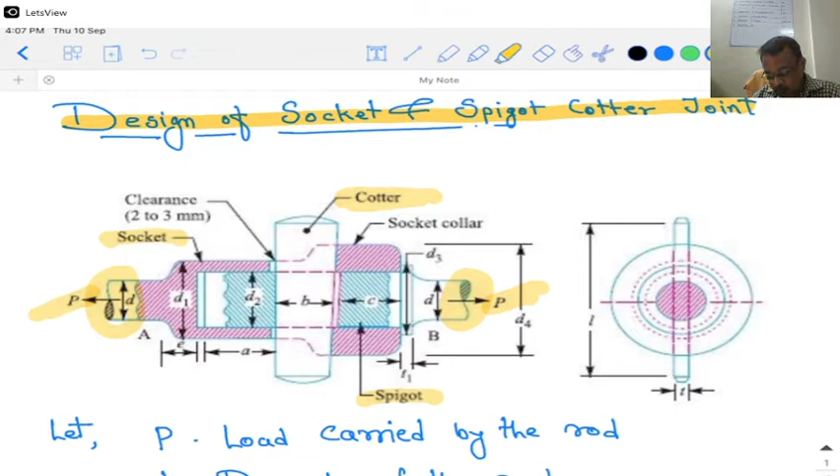Now whatever this socket and spigot cotter joint is there, we are going to design it for the tensile load. Why tensile load and why not compressive load? Because most of the time this joint is fabricated from material which is stronger in compression than in tension, and that's why most of the time this particular joint is designed for carrying the safe tensile loads. Okay, so let us now start.

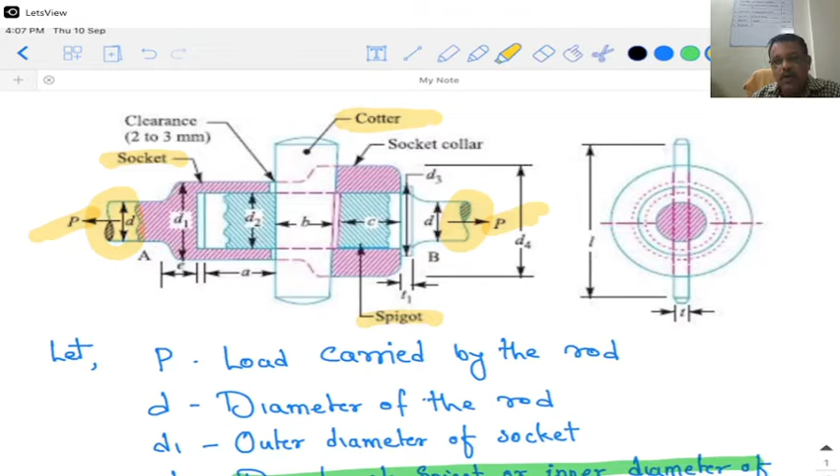Whenever we say that we are going to design this particular component, what we have to generally do is decide what are the various dimensions of that component so that it should not fail during working. Now let us start with this.

Let P be the load carried by the rod. P is the axial load, or we are assuming this is the tensile load which is acted on both the shafts. D is the diameter of the rod. Both the rods which are connected to each other through the socket and spigot joint are assumed to have a diameter D.

D1 is the outer diameter of the socket. What is this D1? If you look at this particular socket, this is the outer diameter.

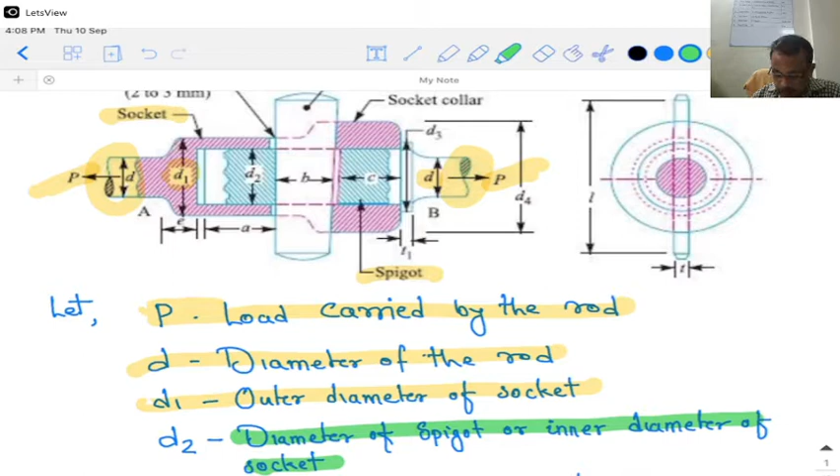D2 is the diameter of the spigot, or inner diameter of the socket. You can see over here, D2 is the diameter of the spigot, or it is the inner diameter of the socket.

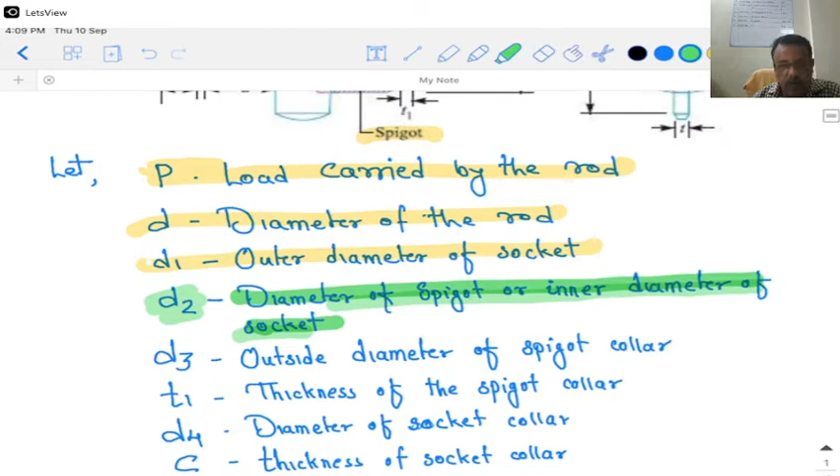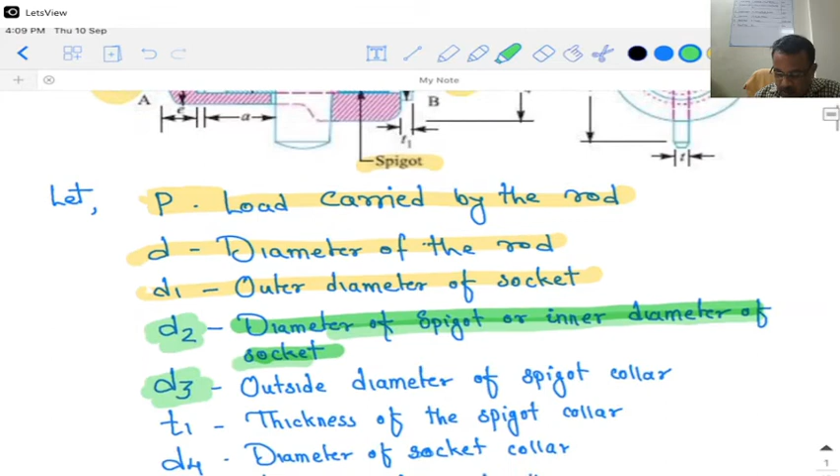Then D3 is the outer diameter of the spigot collar. This spigot is having a collar so that its maximum insertion can be restricted into the socket. So obviously this collar will have a larger diameter than the spigot itself, and D3 is nothing but the outside diameter of the spigot collar.

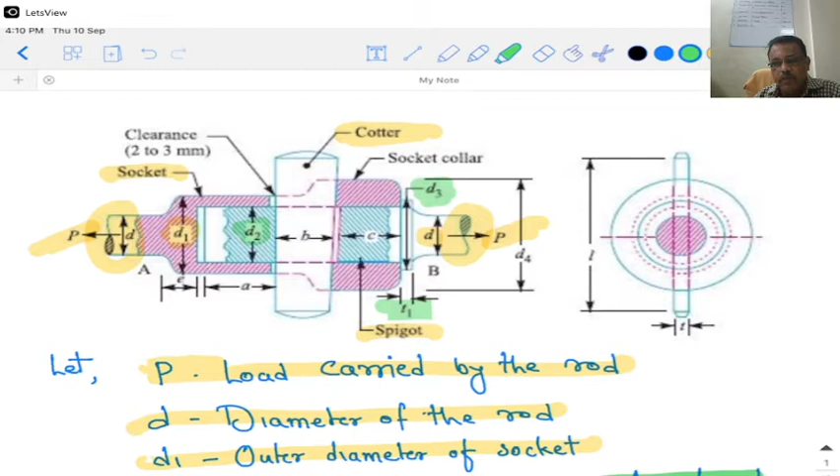T1 is the thickness of the spigot collar. Whatever this spigot collar is there, it is having a thickness T1.

Now D4 is the diameter of the socket collar. So the socket is also having a collar, and D4 is the diameter of that socket collar.

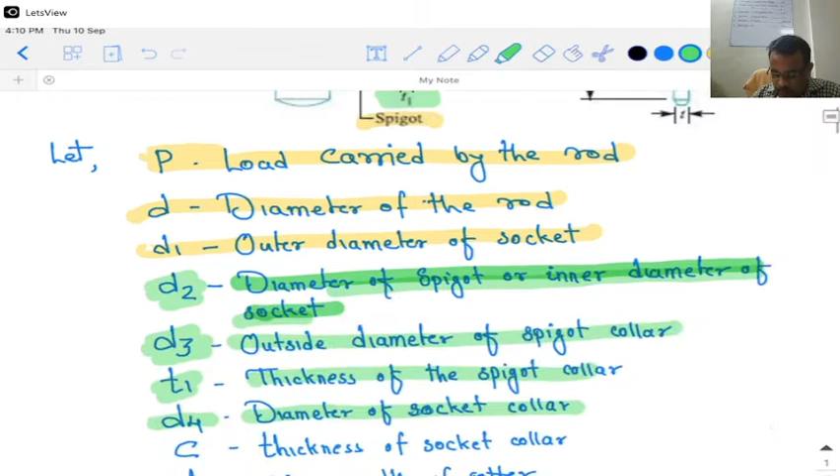While C is the thickness of the socket collar. So whatever thickness the socket collar is having, we are indicating that by the letter C. This is the thickness of the socket collar.

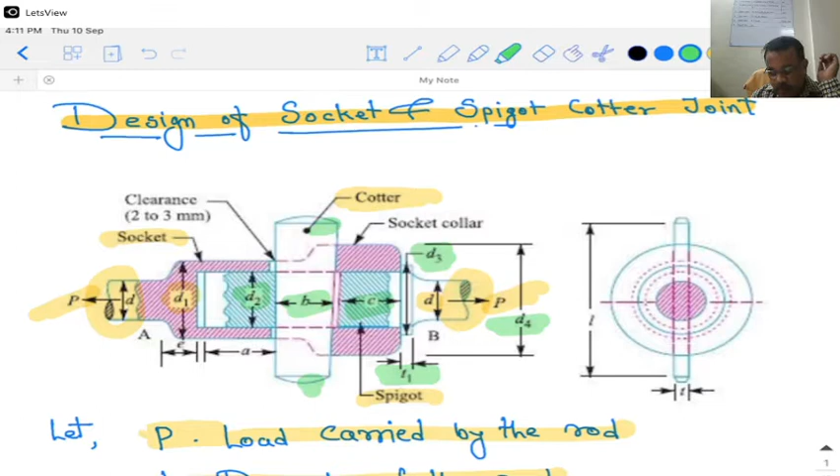Now what is B? B we are considering as the mean width of the cotter. As we know, this cotter is going to have one side tapered, so obviously the dimensions or the width of the cotter is going to change from top to bottom, but B we are considering as a mean width of this cotter.

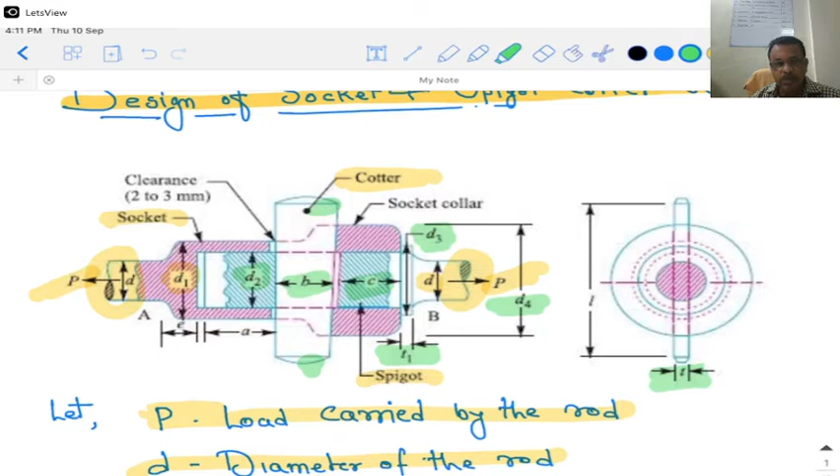While T is the thickness of the cotter. As we see over here, if we look at the side view, T is the thickness of the cotter. So the cotter is actually having two dimensions, as it is a rectangular section, B and T, and obviously length L, the length of the cotter.

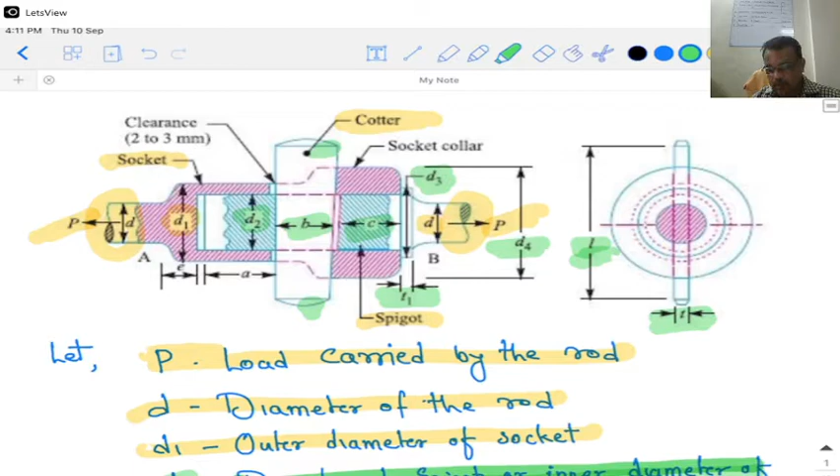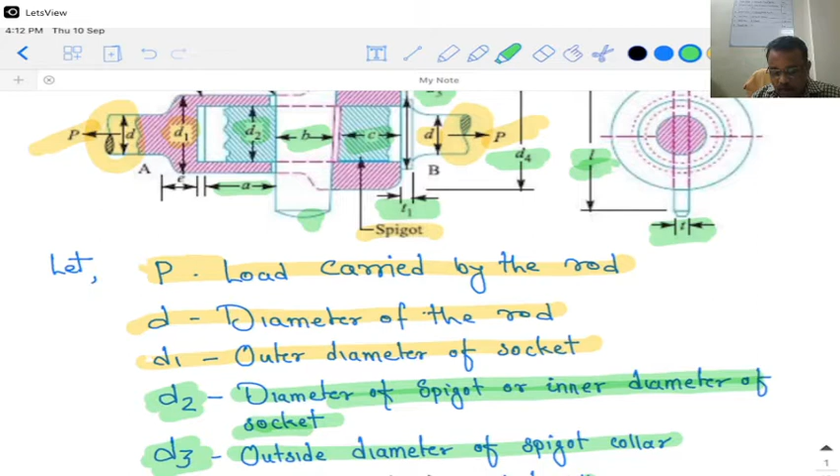A is the distance from the end of the slot to the end of the rod for the spigot. If you look at this diagram, you can see this is A — the distance from where the slot ends to where the spigot rod ends. That is the distance A.

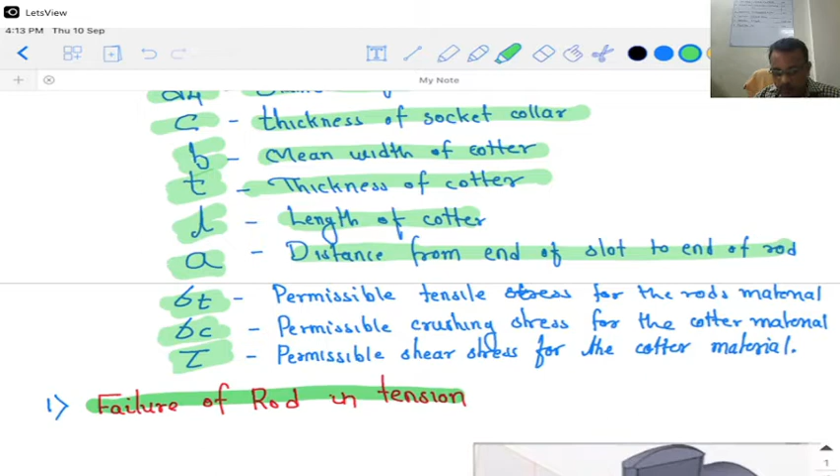These are the various dimensions of the spigot, the socket and the cotter. We are going to make this with the help of some material, so whatever material we use, the permissible tensile stress is denoted sigma T for the rod material, sigma C is the permissible crushing stress, and tau is the permissible shear stress. These are the notations we have made for indicating the dimensions.

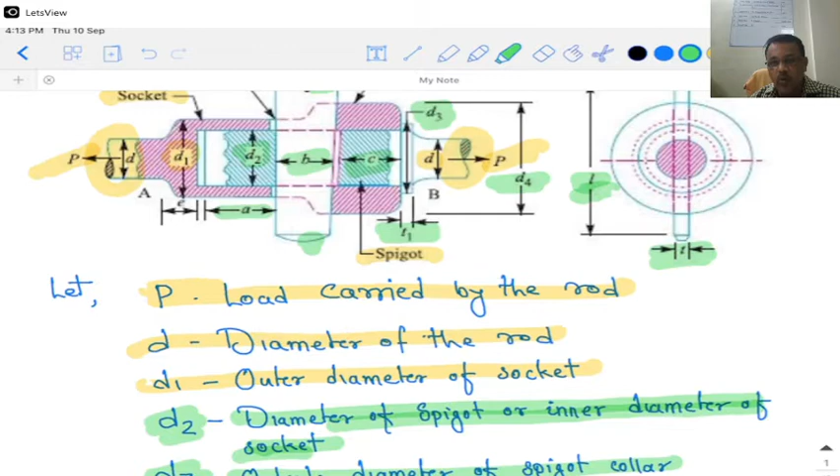Now whenever we design this particular socket and spigot cotter joint, we have to find out the safer dimensions of the socket, spigot and cotter to withstand the given loading conditions. So when we design, we must know in what condition this component is going to fail — whether in shear, in tension, in compression, or in crushing. We are going to find that out one by one.

First of all, we are going to see the design of the spigot. We will start designing the spigot, and first we will find out what will be the safest dimension for the rod which we are going to connect.

If we look at this particular diagram, this is the assembly of the socket and spigot joint. Here, as we know, a tensile force is being applied, so this rod may fail because of tension. So the first failure we are going to consider is failure of the rod in tension.

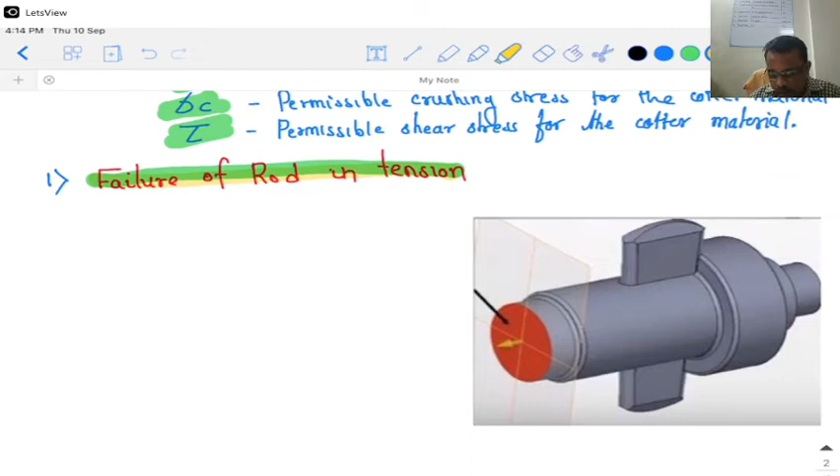Failure of rod in tension means that whenever we apply tensile forces, the rod may fail because of that, and the area resisting this is the area shown in red.

Whenever we design this type of component, we have to consider that stress equals force divided by cross sectional area. So we have to find the cross sectional area which is resisting the failure. Whenever this socket and spigot joint is pulled from both ends, it may fail, and the resisting area is the area shown in red.

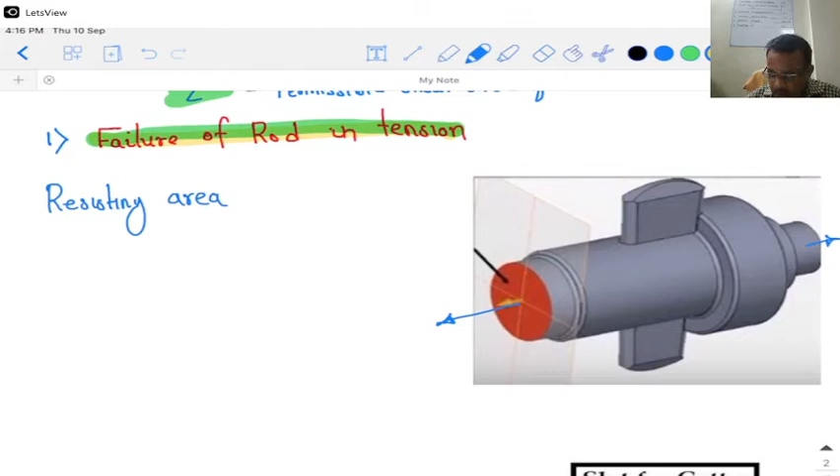What is the diameter we are assuming for the rod? This is d. So the resisting area A is equal to pi by 4 d square.

Since we are considering failure in tension, the permissible tensile stress sigma t is equal to the force applied divided by the cross sectional area. So we can write A equals P divided by sigma t, where P is the applied force and A is the cross sectional area, which is pi by 4 d square. This resisting area, pi by 4 d square, is equal to P by sigma t.

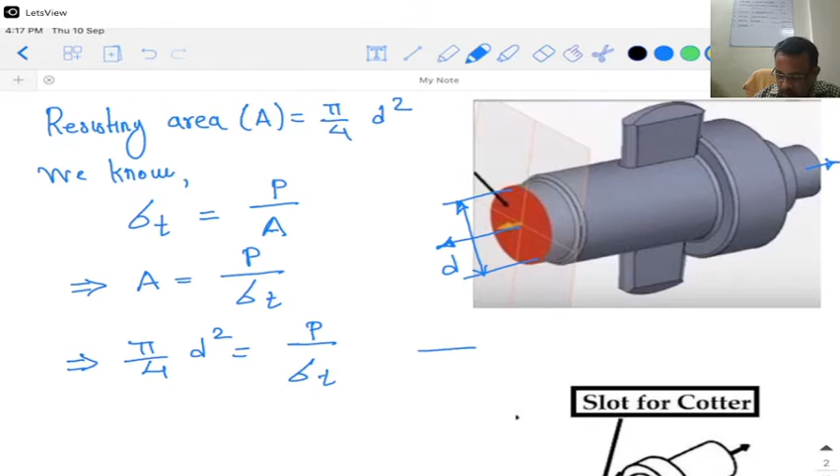If I call this equation 1, what can this equation give us? It can give us the value of d, because we know P — it's given in the problem how much force is applied on the joint — and we know sigma t once we decide what material to use, so the permissible tensile stress value will be known.

So from this equation we can determine the value of d, which is nothing but the diameter of the rod.

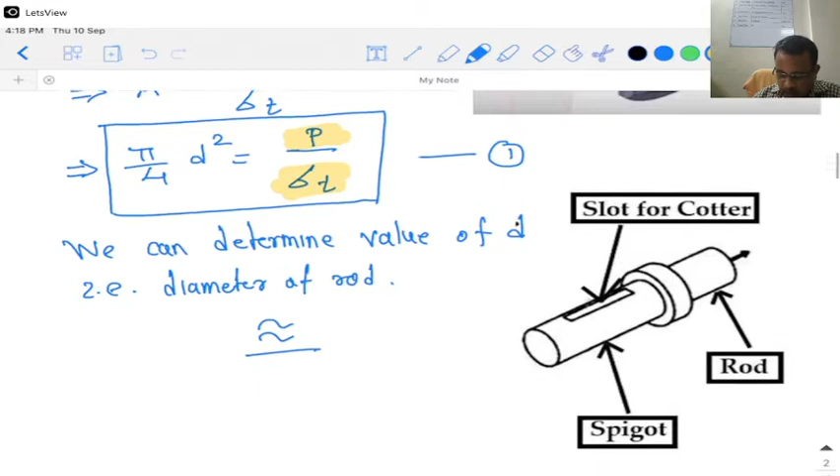Diameter of rod, or shaft—both shafts which are connected to each other. So this diameter d, whatever value we get during calculations, might be in some decimal points, so generally that is rounded off to the nearest integer value. This should be the diameter of the rod so that it can withstand the tensile or compressive forces. So in this way, the first dimension we find out is the diameter d of the rod.

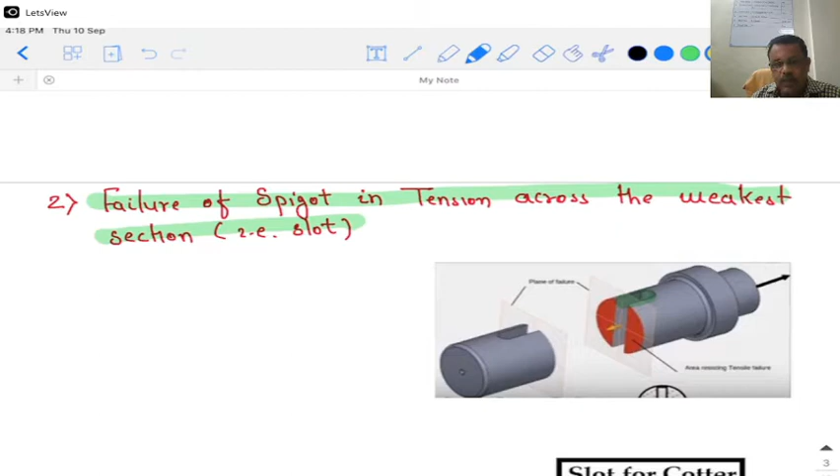Now we will move further. Is it only that the rod may fail? No. Now we are going to see failure of the spigot in tension across the weakest section, that is the slot. If we consider the spigot, it may fail if the force P is applied, at this particular cross section, because it has a slot over here, so this cross section becomes the weakest.

If you can see, the red portion is the area resisting the failure in tension. So what is the area? If I draw this cross sectional diagram showing the area resisting tensile forces—this is a cross sectional area, and this diameter is nothing but d2, that is the diameter of the spigot we are designing, indicated by d2.

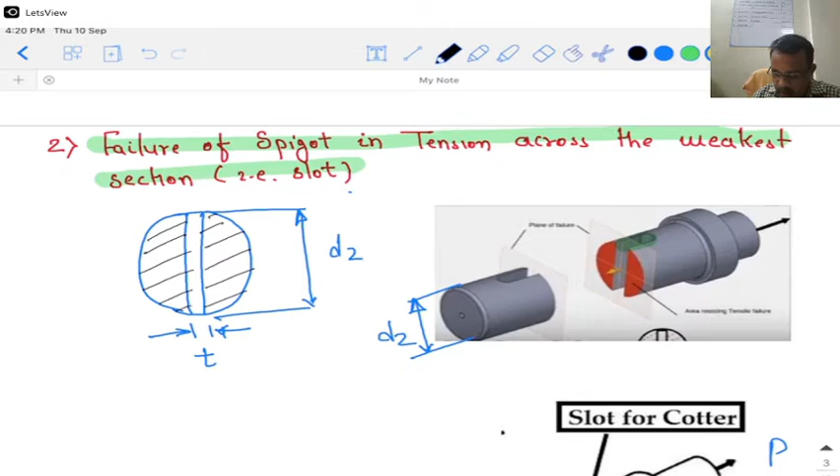And this slot will be t. So if I consider a cross sectional area, or the area resisting tension, then I can find out what is the area which is resisting the tension. So here I can write down the resisting area.

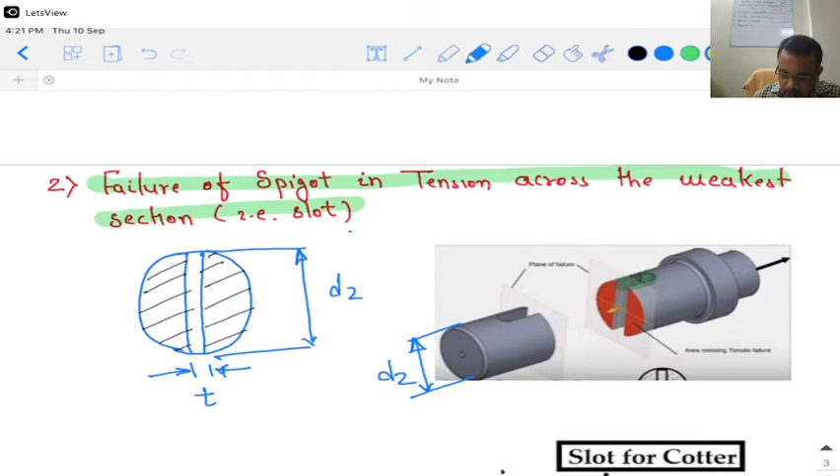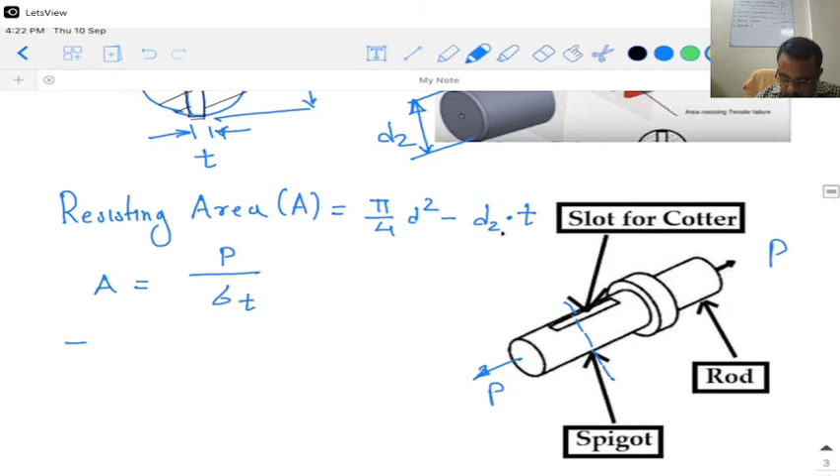Which is resisting the failure in tension, is equal to pi by 4 d square. From that I have to subtract this particular region, because here there is no material, and that region is nothing but d2 into t. As we know, area A is equal to force upon sigma t, that is the tensile stress. So I can write it down: pi by 4 d square minus d2 into t is equal to P upon sigma t.

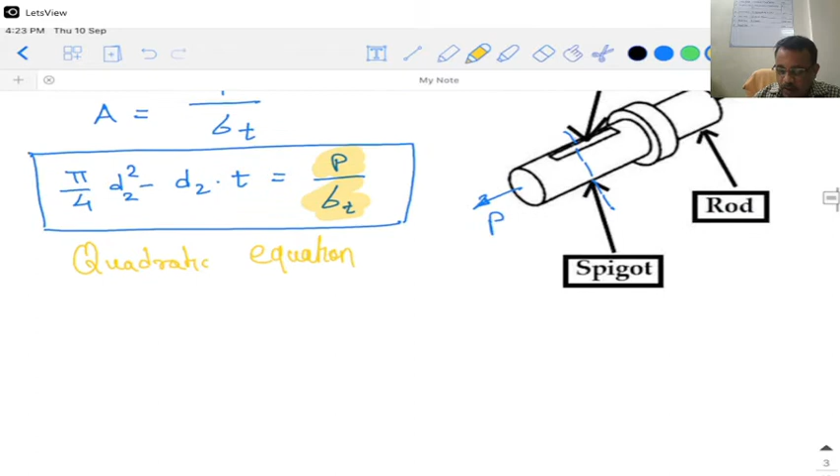Now if I consider this equation, how many variables are not known? P is known, sigma t is known, but d2 is not known and t is also not known. So there are two variables, and it becomes a quadratic equation. These are the two variables which are not known, so obviously you can solve the quadratic equation and find the value of d2 and t.

But if there is an easier way, we can move further: failure of the rod or the cotter in crushing. What we are having is actually a cotter—there is a cotter like this, inserted into the slot, and we are pulling from this direction and this direction. Because of that, if you consider this cross sectional area, this cotter pin is going to rub against this particular area, and because of the crushing, the rod or our spigot may fail in crushing, or the cotter pin may fail in crushing.

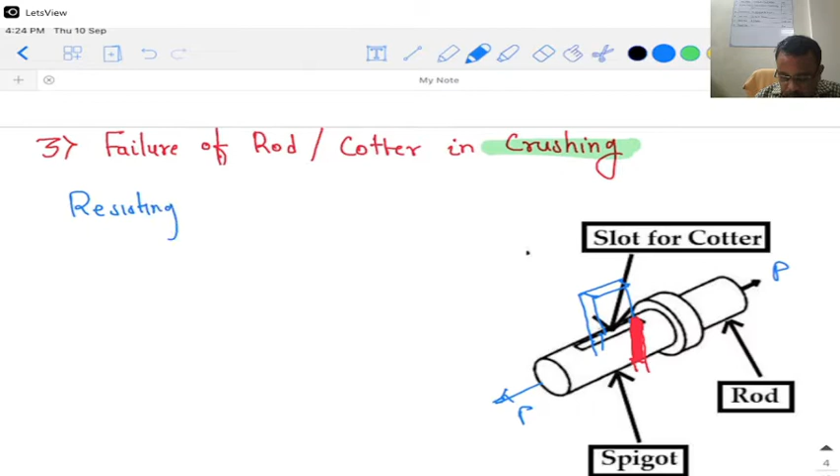So what is the area which is resisting this type of failure? That is the resisting area. If I draw this resisting area, you can see it is like this, having a thickness t of the slot, and this is nothing but diameter d2, the diameter of the spigot. So I can write down resisting area A is equal to d2 into t.

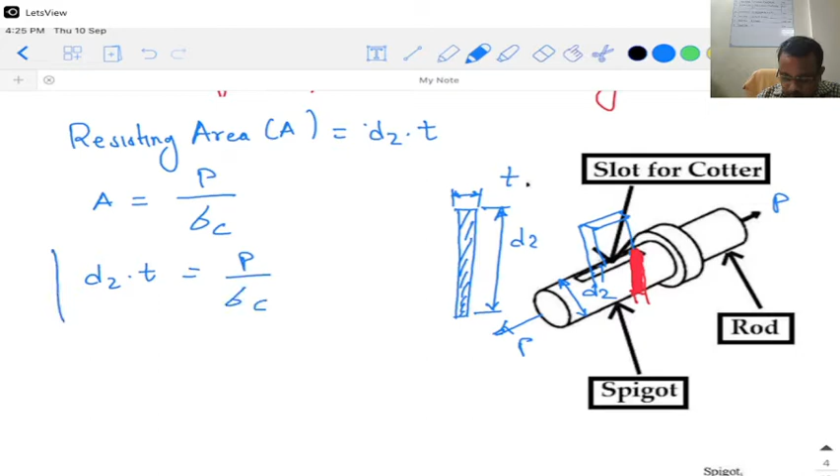As we know, area A is equal to force P divided by the permissible stress—now sigma C, since we are considering failure in crushing. So A is equal to P by sigma C, and D2 into T is equal to P upon sigma C. Now if I can say this is equation 3.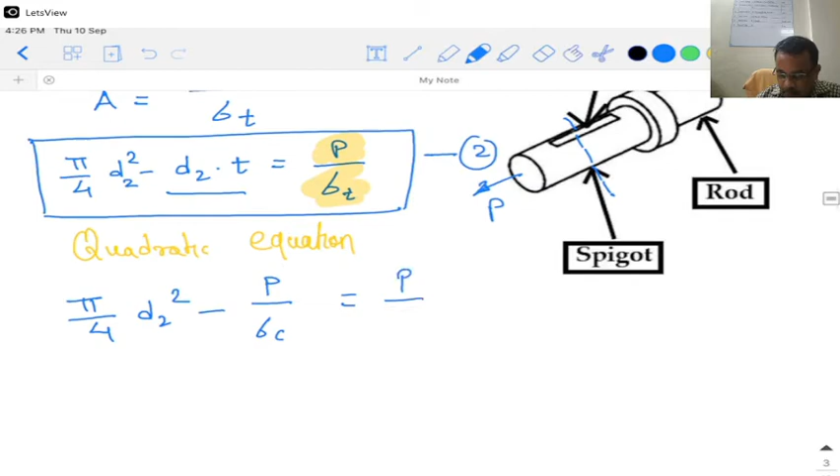And d2 into t—if you look at equation number 2, there is a term d2 into t. So if I replace d2 into t with P by sigma C into equation 2, this equation becomes: pi by 4 d2 square minus P by sigma C is equal to P by sigma t. Now, if we look at this equation, how many things are known?

P is known, sigma t is known, sigma c is known, p is known. So the only variable which is not known is d2. From this we can determine the value of d2.

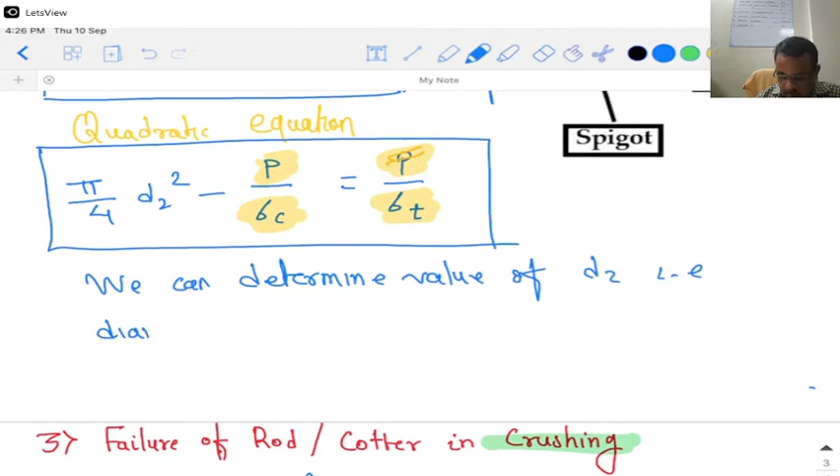D2 is the diameter of the spigot. We are determining the diameter of the spigot. So once you get the diameter of the spigot from this, it is the safe diameter which can withstand the given forces.

And if I put this value into equation 3, d2 is known. Now d2 is known, p is known, sigma c, and d2 is known. Now what I can find out is the value of t.

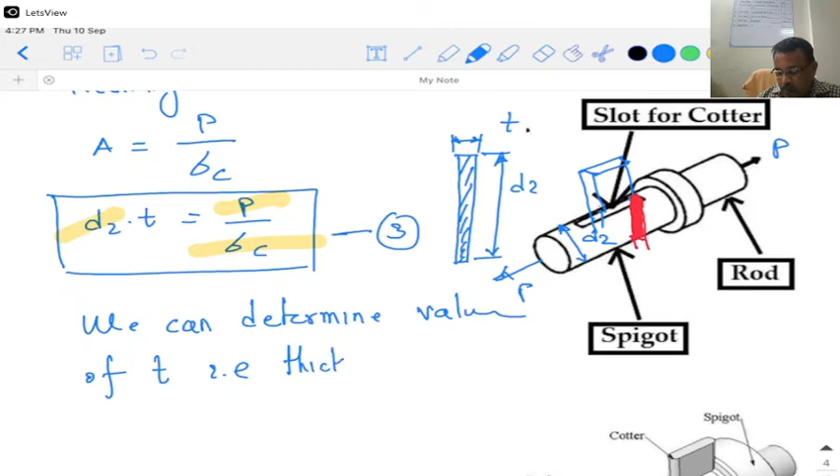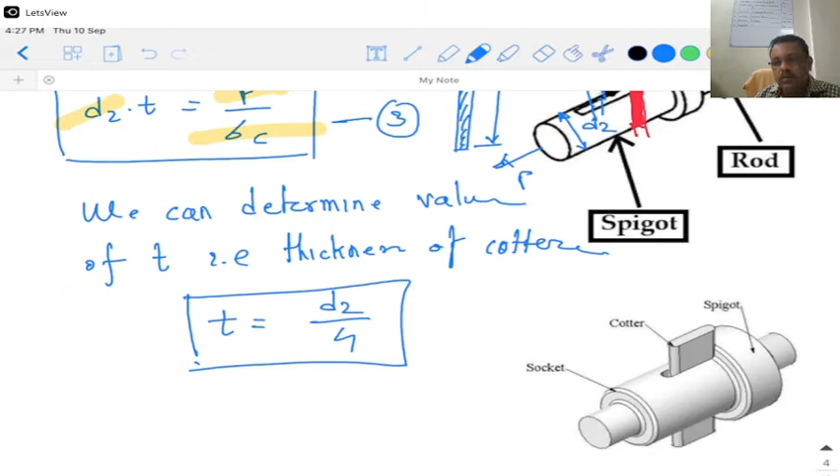So from this we can determine the value of t, that is the thickness of the cotter, or we can say it is again the slot thickness, and the cotter thickness will be the same. Generally this value of t is given as d2 by 4. This relation is followed as an empirical relation. So in this way we can find out the value of t, that is the thickness of the cotter.

Now we will consider the next failure, that is failure of the spigot collar in crushing. Whatever this spigot is, it has a collar, and this collar is being rubbed against the collar of the socket. Because of the forces P and P, this may be tensile, this may be compressive, and because of this particular region, there will be crushing.

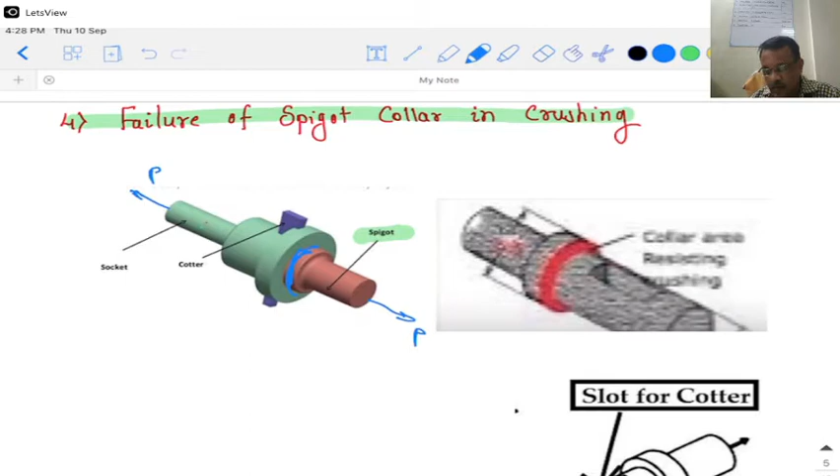If you see the red portion, this is the area which is resisting the crushing. So again we have to find out what is the area which is resisting crushing, or we can say the resisting area. Resisting area A is equal to this area, it is nothing but the resisting area.

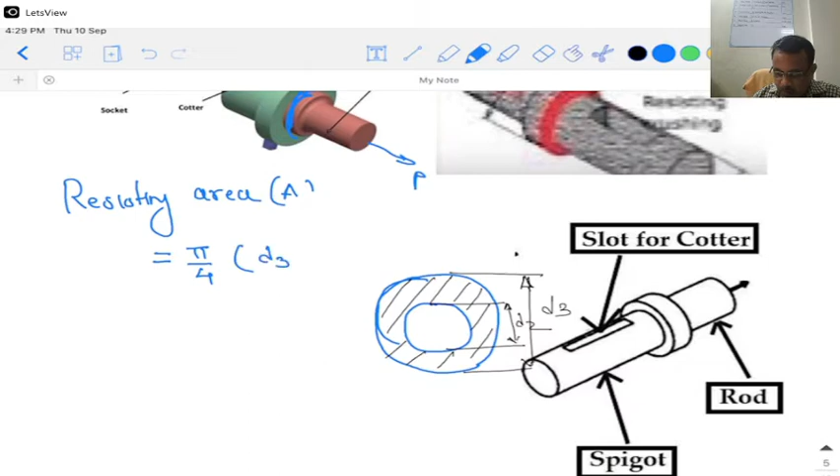If I draw this resisting area, you can find this is nothing but d3, that is diameter of the collar, and this is nothing but d2, that is diameter of the spigot. This particular area is resisting the crushing. So I can write down the area resisting the crushing is equal to pi by 4 times d3 square minus d2 square. This is the area which is resisting crushing.

So as we know, area A is equal to P divided by sigma c, because we are considering the failure in crushing, so permissible crushing stress, it is nothing but pi by 4 d3 square minus d2 square is equal to p by sigma c. Now in this equation, p is known, sigma c is known, d2 we just found out. So the value of d3 can be determined from this particular equation.

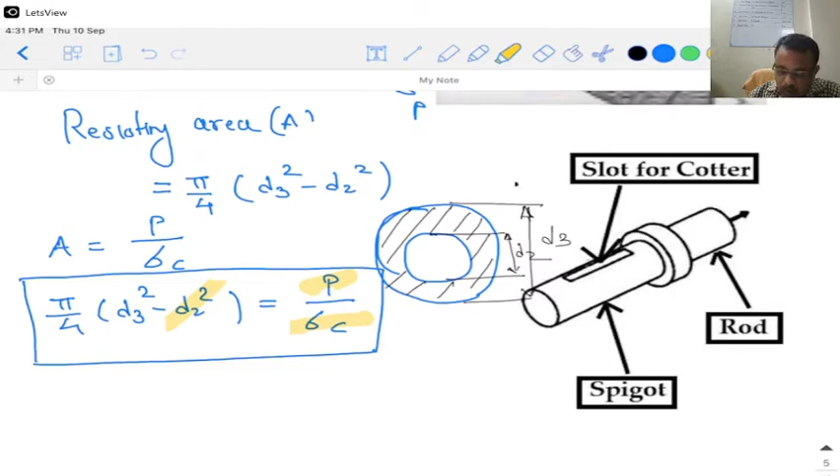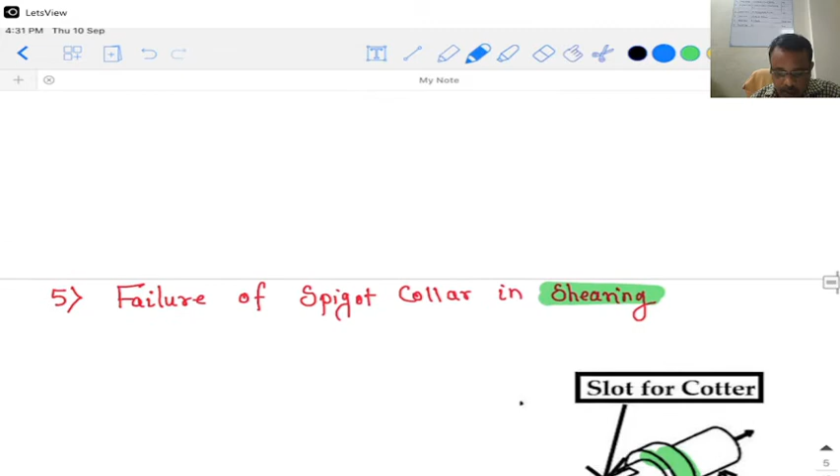What is this d3? It is nothing but the diameter of the collar of the spigot. So from this equation we can determine the value of d3, that is the diameter of the spigot collar. So here again one more dimension we find, and this will obviously be the safe dimension, and there will be no crushing failure if you put that particular dimension.

Again we will consider another type of failure, called failure of the spigot collar in shearing. So what is failure of spigot collar in shearing, and what is the resisting area? What do we mean by shearing? As we are applying the forces P, this particular collar may turn out and come out. Because of that, what may happen...

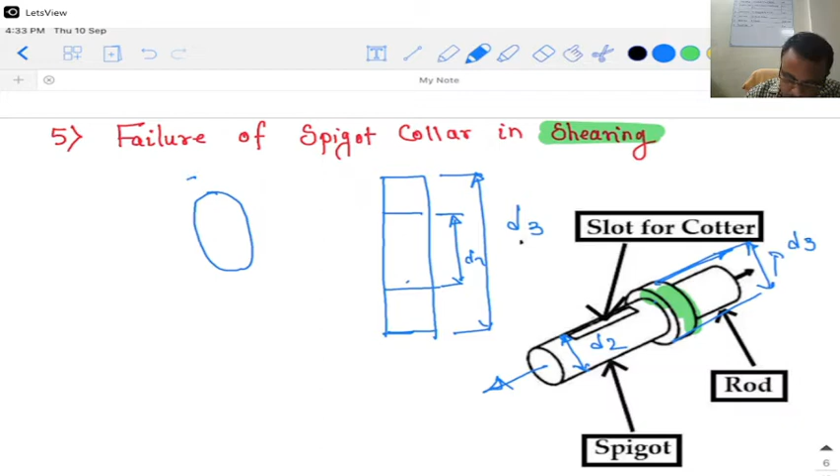What area is resisting this? If I can draw the diagram, this is D3, the diameter of the spigot collar, and this is D2, the diameter of the spigot. So if I draw this particular section, I come to know this is D3 and this is D2. And if we look at this particular collar, it is something like this.

Whenever this comes out, this is the area, or we can say this is the thickness T, which we are considering as T1. So the resisting area, which is going to resist the shear failure, A is nothing but pi d2 into T. Why pi d2 into T? Because whatever this area is there, that is the circumference multiplied by T, thickness, and that is the resisting area.

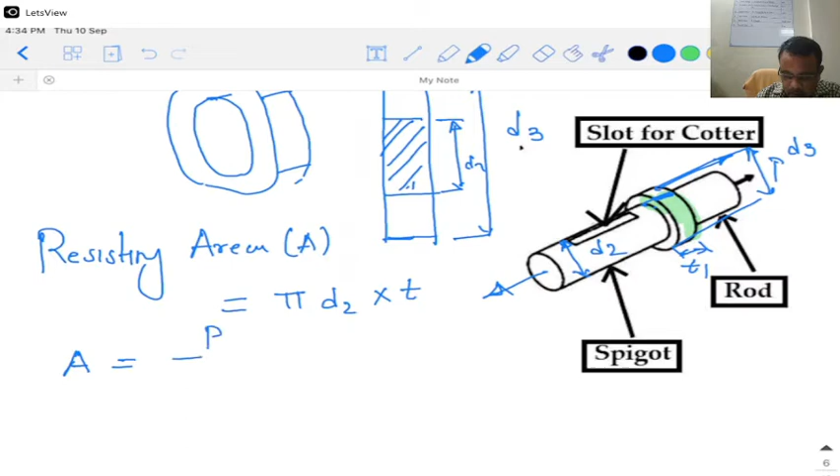As we know, A is equal to P upon, as this is a failure in shear, which stress we are going to use? Tau, that is shear stress, permissible shear stress. So pi d2 into T is equal to P upon tau. If we look at this equation, what is known to us and what is not known? P is known, tau is known, and D2 we found out.

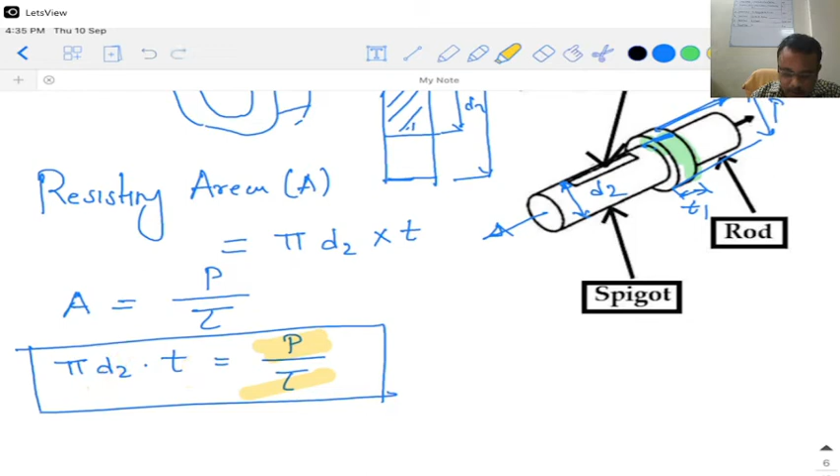So what can we get from this? We can get the thickness T1. So from this we can determine the value of T1, that is thickness of spigot collar. So we have determined the thickness of spigot collar.

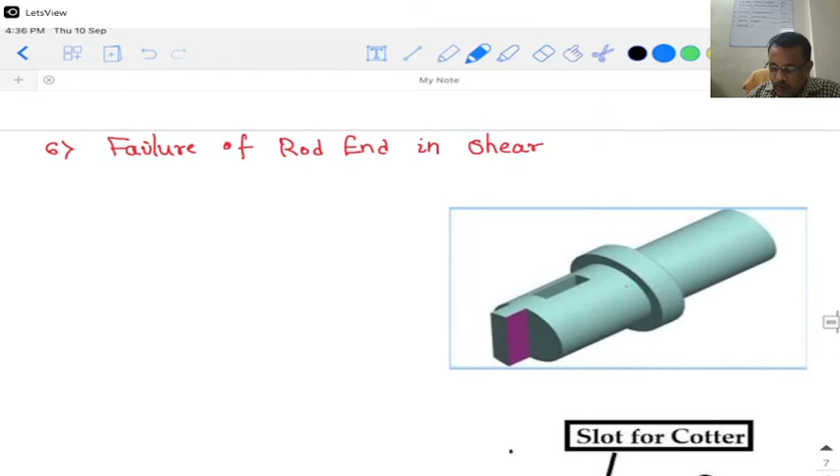Now we will move to the next type of failure, that is failure of rod end in shear. If we consider this spigot, here there is a cotter pin like this, and as we are pulling from this side and this side, this cotter pin may try to come out from this slot. Because of that the middle portion, which is the weaker portion, may come out, and there may be shearing over there. That is the area which is resisting.

If I draw, it is going to look like this, and this is the area which is going to resist this type of failure. Is it the only area? No. The backside area is again going to resist. So that is what we are calling double shear, or failure in double shear.

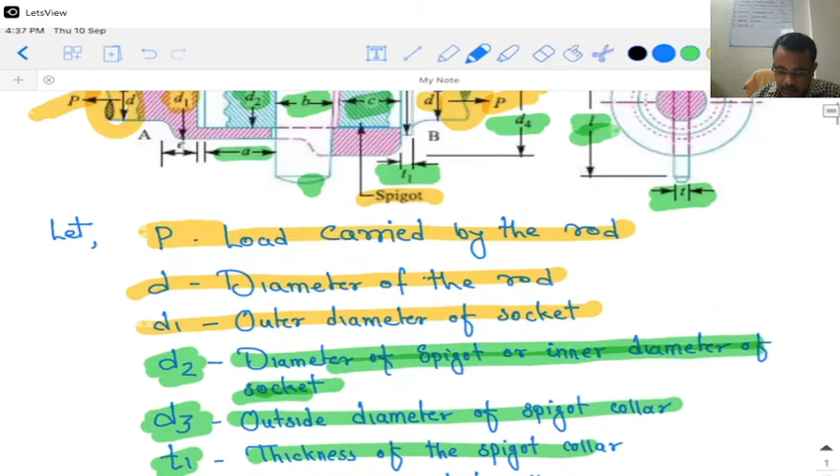So what are these dimensions? This dimension is nothing but the diameter of the spigot, that is D2, and this we are considering as A, distance from end of slot to the end of rod, that is this A.

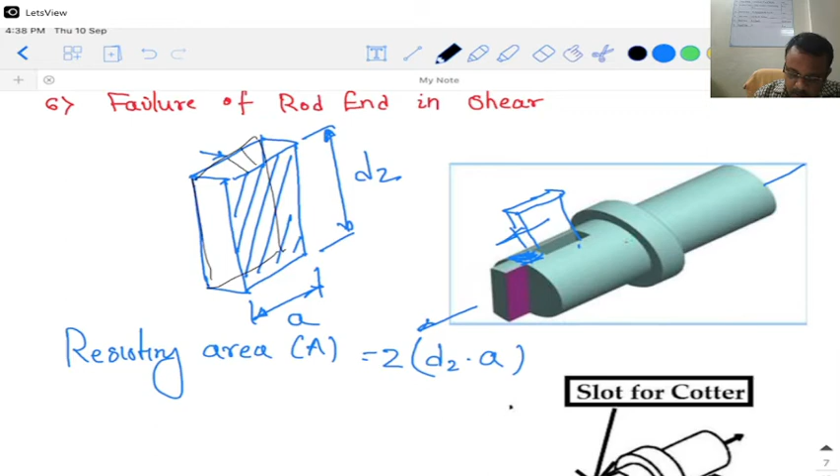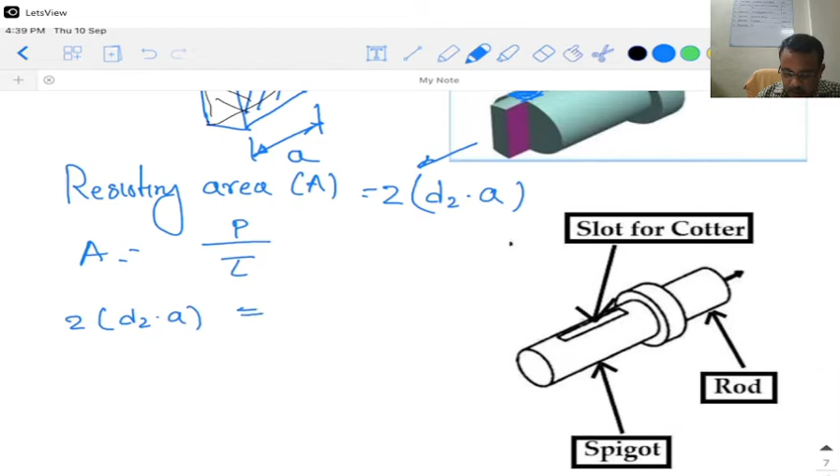So area resisting, area A is equal to D2 into A, but it is in double shear, that is equal and opposite area. From the opposite side it is also resisting the failure in shear, that is the backside area, this particular portion is again participating in resisting the shear, and that's why we are saying 2 into d2 into a. As we know, a is equal to p divided by tau, that is failure in shear, and we are saying 2 multiplied by d2 into a is equal to p upon tau.

If we look at this equation, what is known? P is known, tau is known, d2 is known. So what value are we going to get? That is the value of A. So we can determine the value of A, that is distance from end of slot to end of rod, this distance we determine just now.

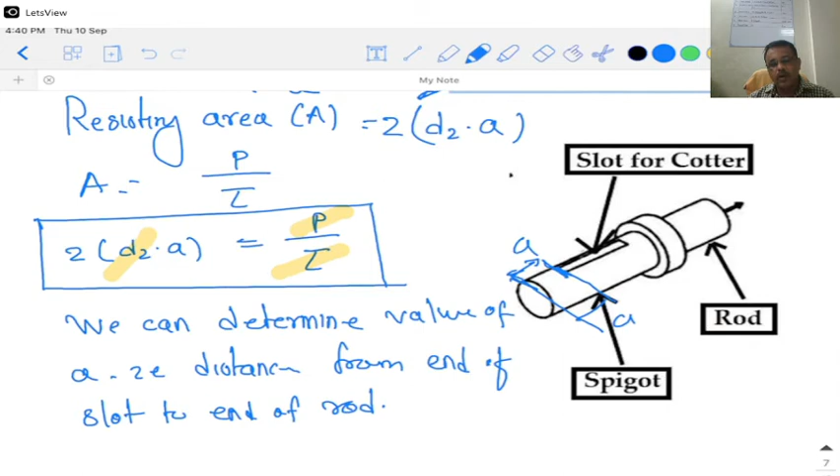If this distance is less, then what may happen? This particular portion may shear out and come out. So that is the failure of the spigot here. Up till now we have found out all the dimensions and completed the design of the spigot.

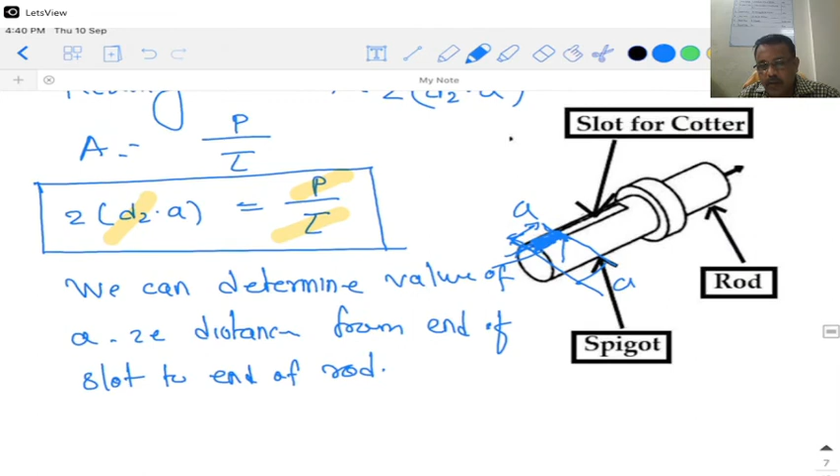So spigot is ready now, and now we are going to find out the design of the cotter. The cotter has three dimensions: length, breadth and thickness. Thickness we already found out. Length has empirical relations that can be decided because it does not have any role in the failure. And obviously width we have to find out. So we are considering the failure of the cotter in shear.

If you consider this cotter, we know there are forces in this direction, and as the socket will be pulled in this direction and spigot will be pulled in the opposite direction, all the load will be taken by this cotter.

So this cotter may shear out and there will be a shear. If you can see this particular diagram, here there is a failure, and whatever the resisting area, the red area shown, that is the area resisting. So if I draw this resisting area, you came to know what is this actually.

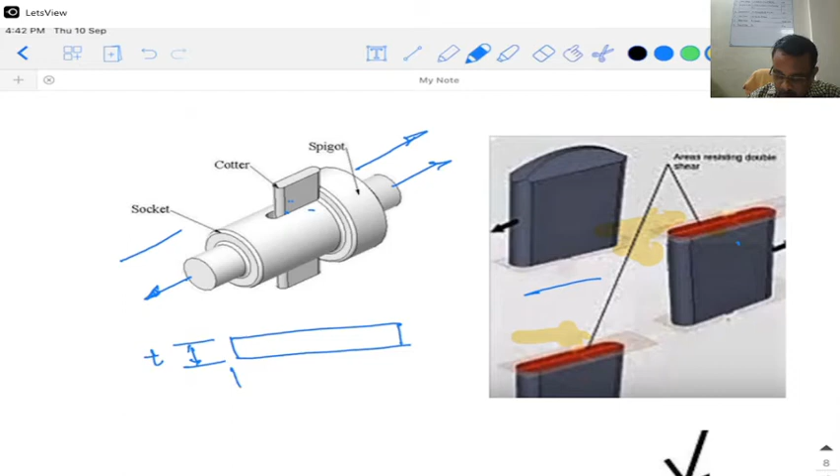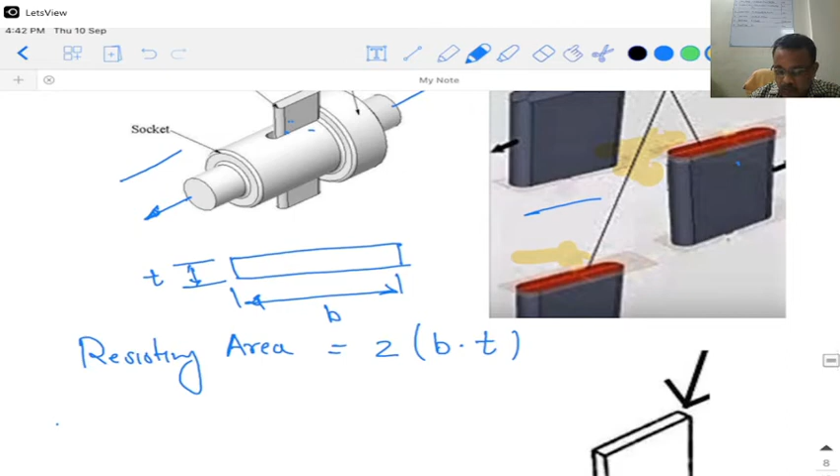This is the thickness T and this is the width B. So resisting area is nothing but B into T, and as there are two cross sectional areas, double shear, that's why we are saying 2. As we know, A is equal to P by tau since it is a failure in shear, so 2 into B into T is equal to P by tau.

So if we look at this particular equation, what is known and what is unknown? P is known, tau is known, thickness T is known. From this we can find out the value of B, the width of the cotter.

So thickness T we already found out, and width B. So here we completed designing of the cotter also. Now we are shifting our focus on the designing of the socket and failure of the socket in tension across the slot.

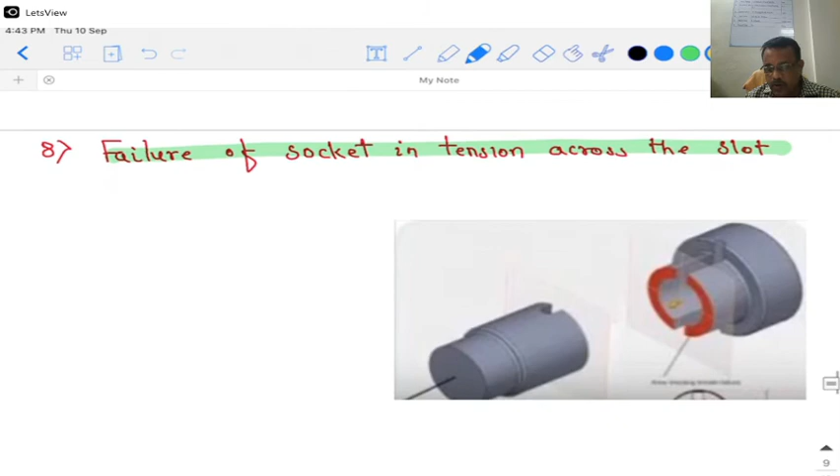As we know, this is a socket and we are applying the force P, so it may fail, and it may fail at the weakest section. Where is the weakest section? Where there is a slot. So again we are finding out the resisting area, using the same principle, stress is equal to force upon cross sectional area. We just have to identify what area is resisting this particular type of failure.

Resisting area - here if I draw the diagram, it looks like this, if you can look at this red portion. The small diameter is nothing but d2, that is the internal diameter of the socket, or we can say diameter of the spigot. And this is nothing but d1, that is diameter of the socket. And here what we are having, actually we are having slots.

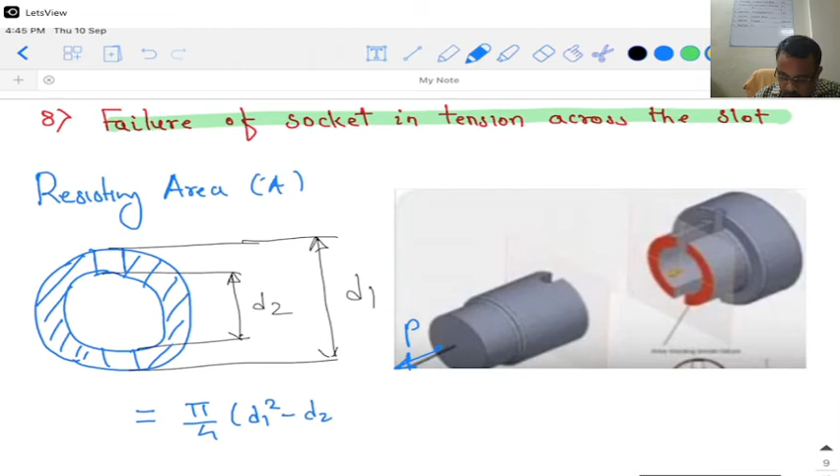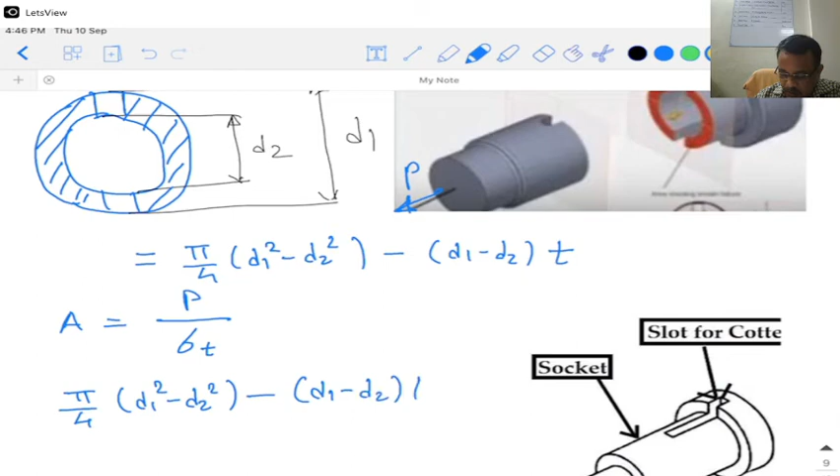So this is the area which is resisting. Area resisting A is equal to pi by 4 times d1 square minus d2 square, minus, and this is nothing but thickness T, minus d1 minus d2 into T. So this is the area, and as we know area A is equal to P upon sigma T, since failure is in tension.

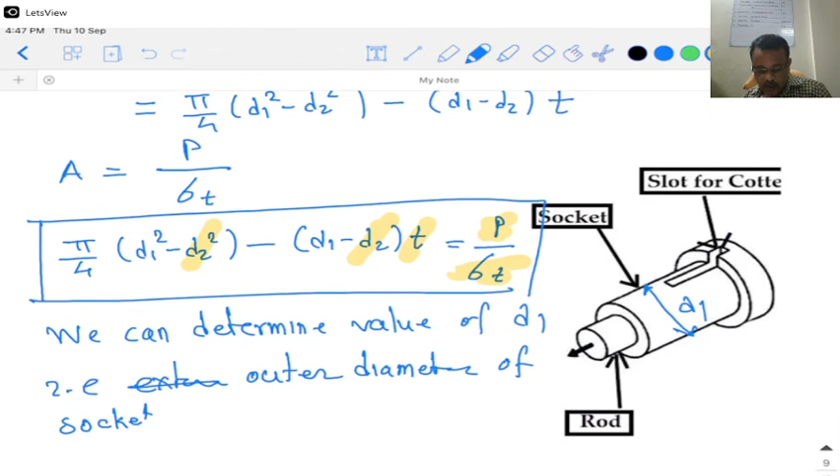So pi by 4 times d1 square minus d2 square, minus d1 minus d2 into T, is equal to P divided by sigma T. If we look at this equation, P is known, sigma T is known, d2 we already found out, T we know, and what is unknown? Only one variable is unknown, that is d1. So from this equation we can determine the value of d1, that is the external or outer diameter of the socket. So here we have found out the outer diameter.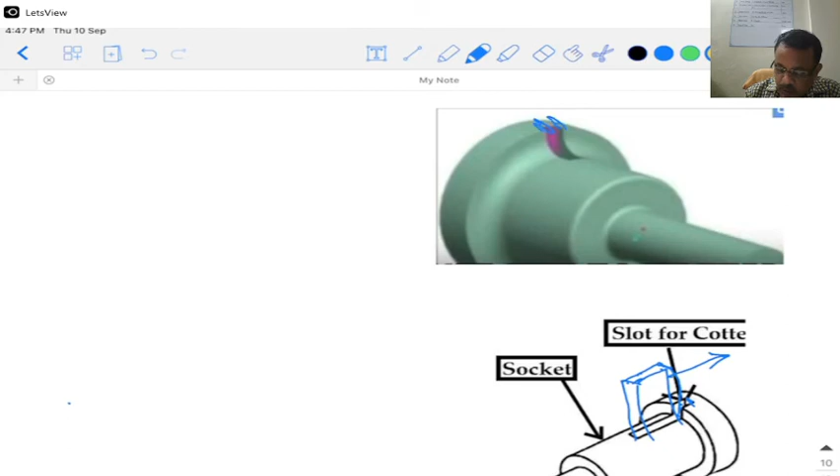Now, failure of the socket collar in crushing. Now what we are considering, if you look at this particular slot, again there is a cotter pin inserted into this. And when this cotter pin will be pulled at this particular portion, shown red here, there will be crushing and there may be a failure because of crushing.

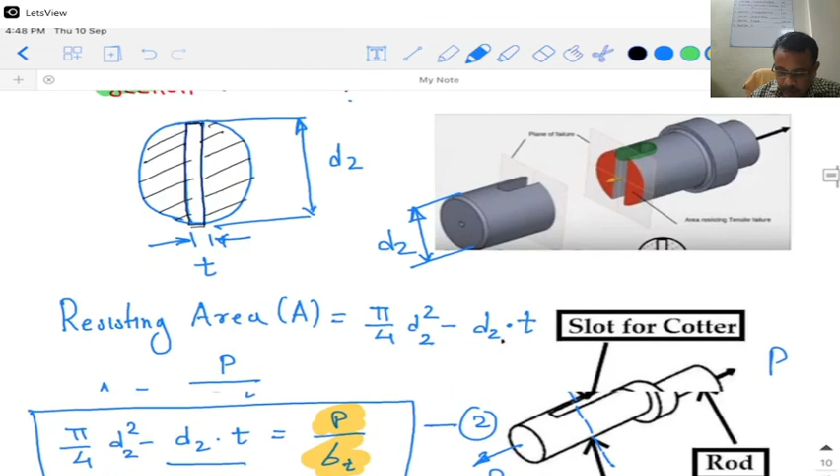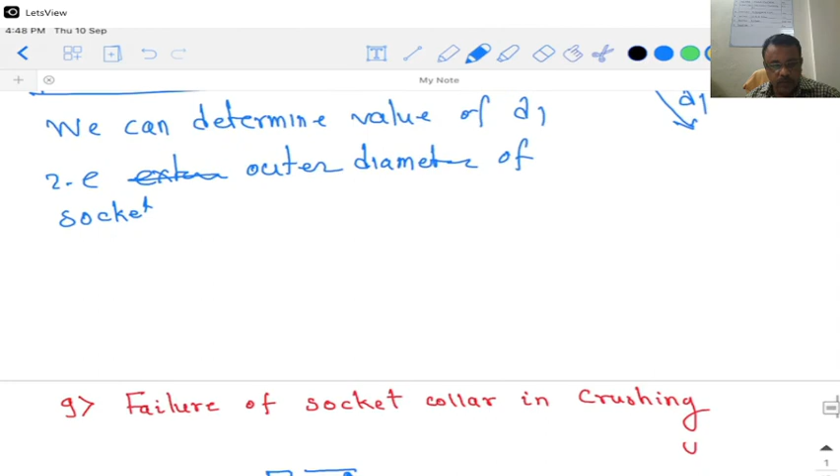So if I draw the resisting area, this resisting area will look like this - this is d4, the diameter of the collar of socket. And this is the internal diameter, that is d2. So the area resisting crushing is this much, and there is a hole inside, and that hole is equal to the diameter of the spigot, and that's why there is no material over there, in the resisting area.

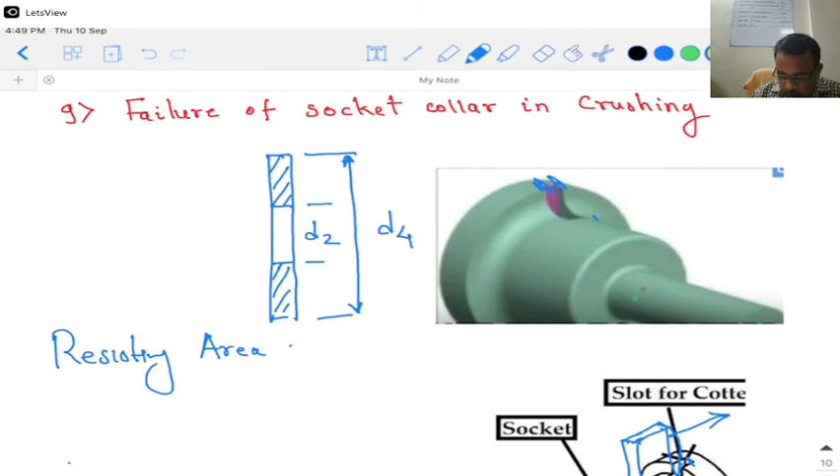If I say resisting area A is equal to, what is the resisting area, and thickness is T. So resisting area is D4 minus D2 multiplied by T. So we know area A is equal to P divided by sigma C, that is crushing stress, and that's why D4 minus D2 multiplied by T is equal to P by sigma C.

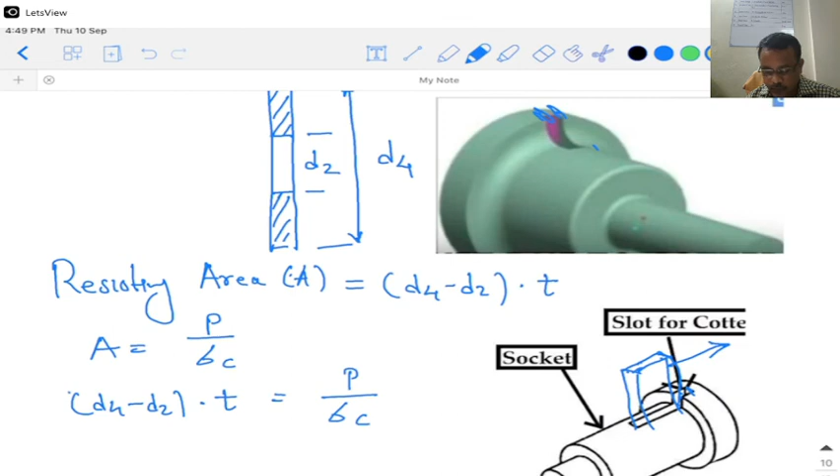Now if we look at this particular equation, what is known and which is the variable unknown to us? P is known, sigma C is known, T is known, D2 is known. So from this we can determine the value of D4, which is the diameter of the collar of socket.

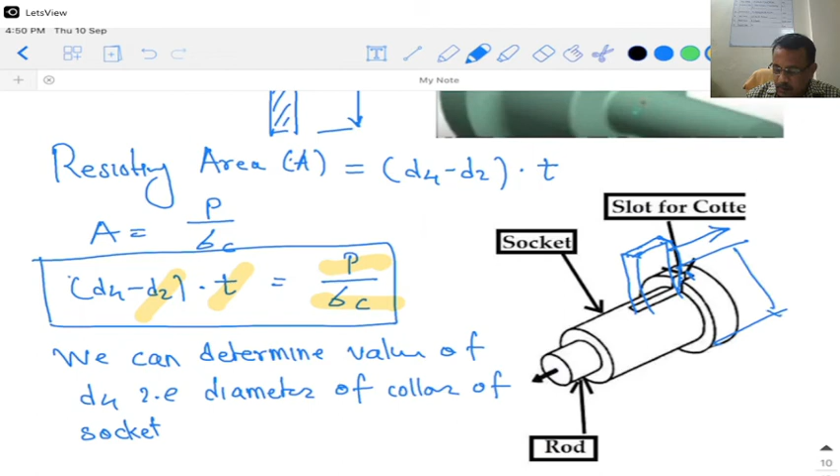Okay, so we got the diameter D4. Now we will consider failure of socket end in shearing.

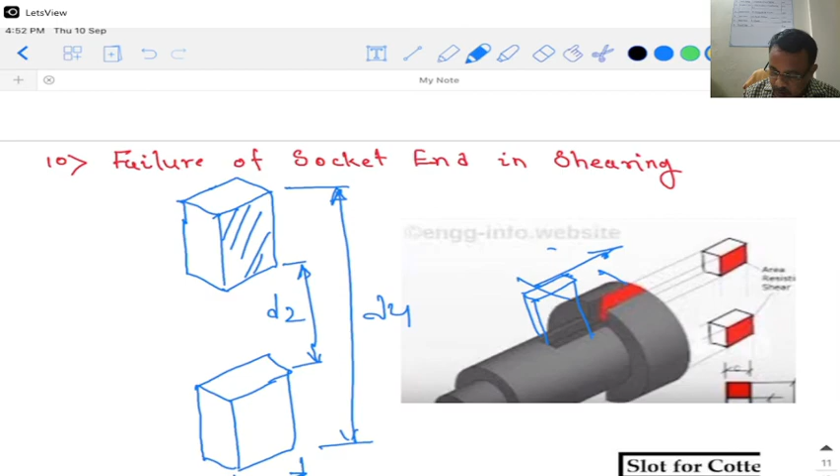So if I draw the diagram over here, it will look like this. This is the external diameter D4, and this portion is the internal diameter D2, and this is the area which is resisting. This particular portion is what we call thickness C. Let us check what letter we assign to it - C. Okay, this is C, that is the thickness of the collar of socket.

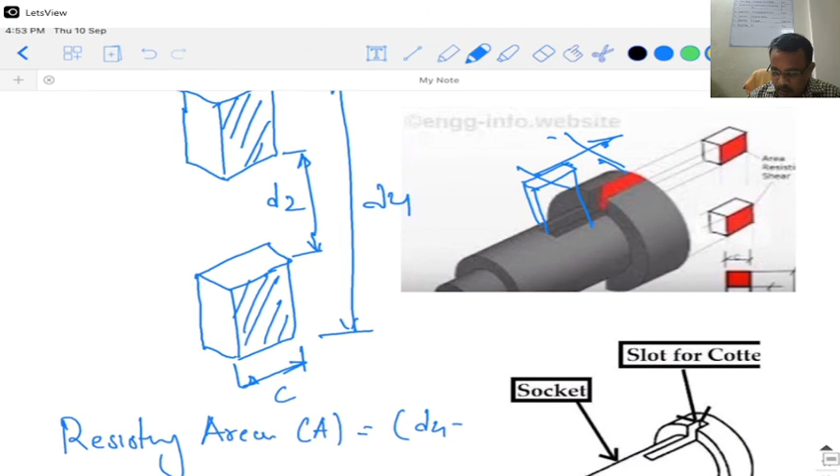So this is area, again in double shear. So resisting area A is equal to D4 minus D2 into C. We will get this, and we know area A is equal to P by tau as failure in shear, that is D4 minus D2 into C is equal to P by tau.

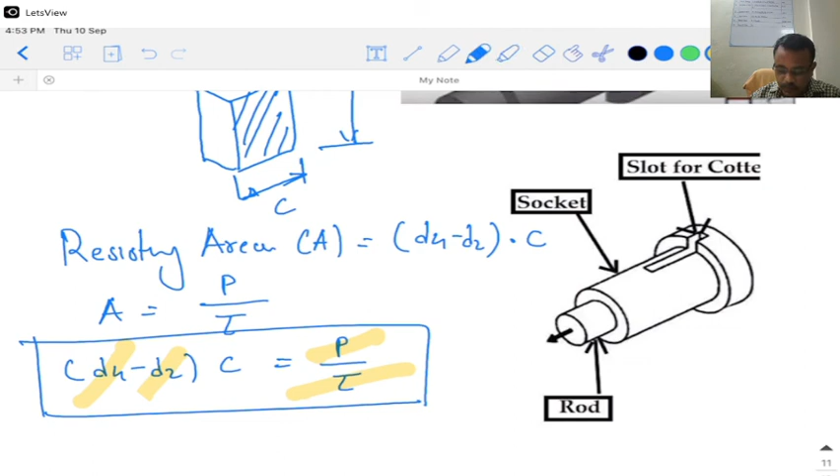So if we consider this particular equation, you come to know what is known to us. P is known, tau is known, D2 is known, D4 we just found out. So the unknown is C, and we can determine the value of C, that is the thickness of the collar of socket. So this thickness C we determined over here.

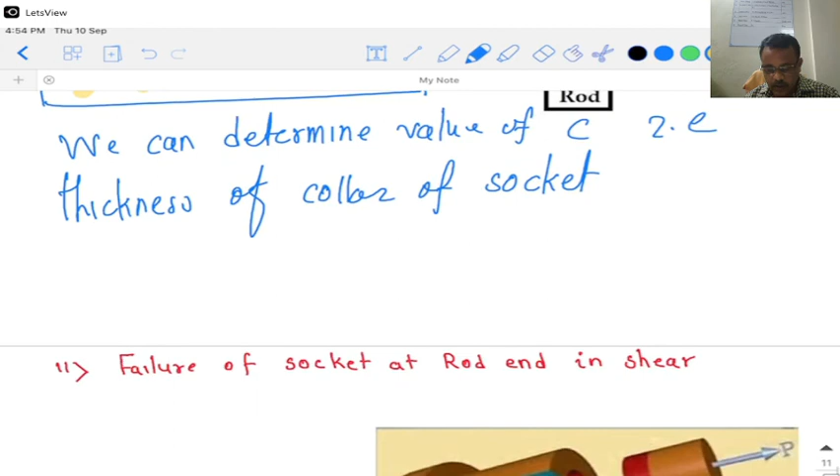Now most of the things we have found out. The last one is failure of socket at rod end in shear. If I consider this as E, because now there is a certain thickness at the end of the socket, and then the rod is attached over here with diameter D. Now when it is pulled, it may try to come out, and there may be shear over here. This depends on diameter D and how much material E is there. If the material is very less, it may come out.

So this portion, if I consider this material as E, this is the resisting area. Diameter is D, and this portion if I say E, so the resisting area which is resisting shear failure is pi D, that is circumference, multiplied by this particular E, that is its length or the quantity of material which it is having.

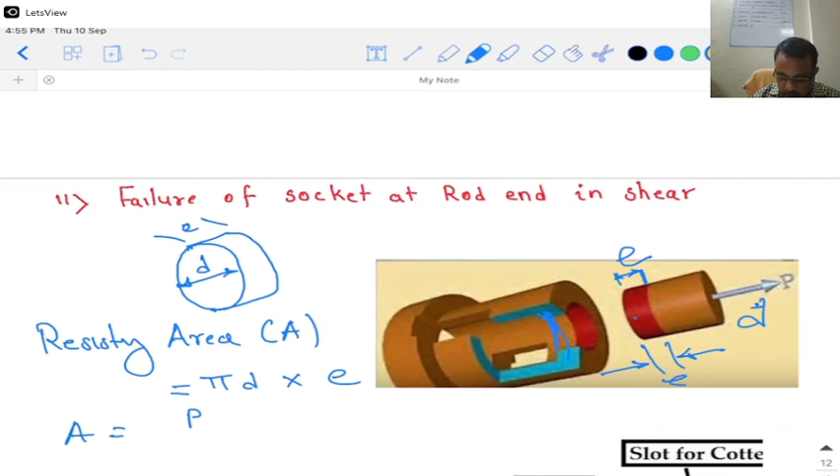And as we know, A is equal to P divided by tau for shearing. So pi into D into E is equal to P by tau. If we look at this particular equation, what is known? P is known, tau is known, D is known - we already found this out in the very first stage.

So the value of E can be determined. So the value of E, that is how much material we need to put over there so that there should not be failure of the socket end because of shear, can be determined.

So this is the way by which we can design the socket and cotter spigot joint. Obviously, first we will start from the spigot, then we will design the cotter, and lastly we will design the socket. In this way we can design and make a safe socket and spigot joint for given loading condition and given material. Okay, so thank you very much.